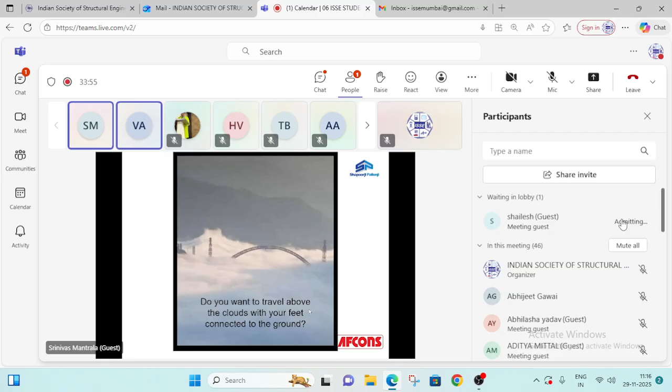Do you want to travel above the clouds with your feet connected to the ground? When you travel by aeroplane, you are above the clouds, but your feet are not connected to the ground. If you want to travel like this, you have to go by Chenab Bridge. This is the photograph of the construction site when we were erecting the arch in a beautiful winter month. So the bridge is above the clouds. Now it is a good season for anyone interested to travel to Jammu and take a train to Srinagar.

Chenab Bridge is the world's highest railway bridge and is a part of the Udhampur Srinagar Baramulla rail link project, and it is located in the Himalayas. They are young, active mountains, the temperatures go sub-zero, it is difficult to access, and a sensitive border area. These are the issues related to location. This is the location of the bridge, the Chenab Valley, where we have constructed the bridge.

But there is something behind the bridge, the spirit of the bridge. That is the real bridge, and that spirit is new technologies and innovations. Implementing new technologies and innovations is not a joke. It cannot happen just like that. One example: suppose you want to cook a nice dish and impress your fiancée. Do you call her and then prepare it just like that and give it to her? Then she will throw you out. Same is here also. So what do you do to impress her?

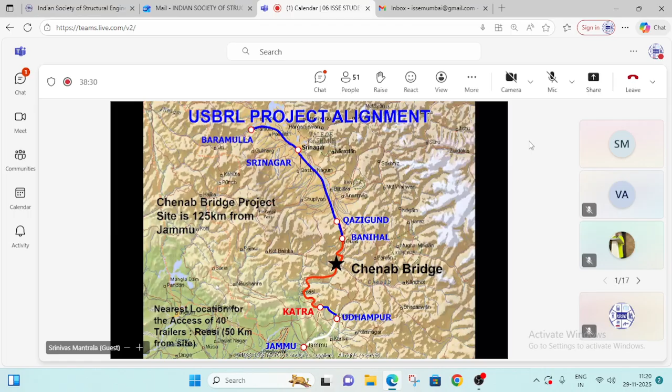So these are the people involved. Northern Railways and Konkan Railways are the client. Contractor is Afcons in a joint venture, and the design consultant is from Finland, WSP Finland, and Leonhardt Andra and Partners for Germany. Proof consultant is Scott Wilson Kirkpatrick, now they are AECOM, and Flint and Neill. Flint and Neill are the people who drafted the BS 5400 Part 10 on fatigue detailing. They are the proof consultant for the steel structure, and they're really excellent.

We learned a lot because of them on fatigue detailing. And we have slope stabilization consultants, IISc Bangalore, Professor Sitaram, and IIT Delhi, Dr. K.S. Rao and Professor K.G. Sharma. And Itasca was also engaged. Itasca developed the UDEC and 3DEC softwares.

But I'm very happy to inform you that the entire construction engineering is done in-house by Afcons. Construction engineering is not a joke. Again, this was done with many people involved, guided by Mr. Girdhar, Deputy Managing Director, and Mr. S.B. Joshi, a very famous consultant across all construction companies. They are all involved, and many Afcons engineers were involved in construction engineering.

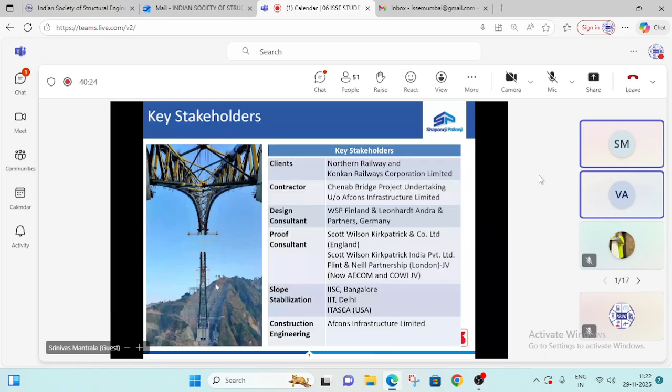So this is the general arrangement drawing of Chenab Bridge. The central portion, the main portion, is the arch, which is a 467-meter span, around 362 meters above bed level, and taller than the Eiffel Tower. Most importantly, on the approach viaduct there is also a transition curve.

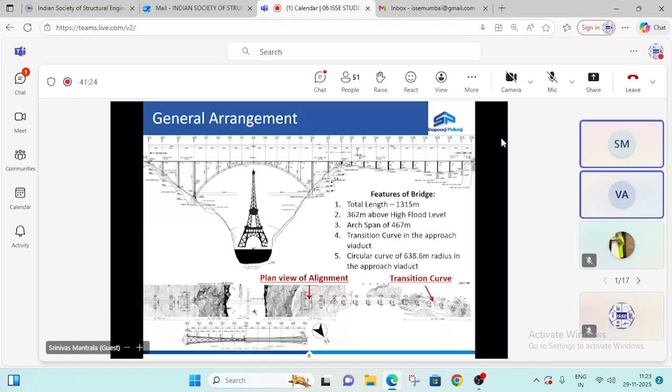Transitions anywhere are the most difficult part to handle. Let me give a general example. Somebody smokes very well, almost 20 cigarettes a day, fine, there's no problem for him. And he stops smoking cigarettes, fine, there's no problem. But he will have a serious problem in the transition from smoking to stopping smoking. In that transition period he will have a tough time. Engineering is the same thing, everywhere it is the same. So we had a problem in the transition curve, and we have solved it.

The entire general arrangement of the deck is a continuous deck. In the arch portion it is a 785-meter long deck, only one piece, and in the viaduct portion it is 530 meters. For construction of this Chenab bridge, we put up a cable crane with a span of 930 meters, and between anchorages the distance is more than 2 kilometers. This is the arrangement we have created.

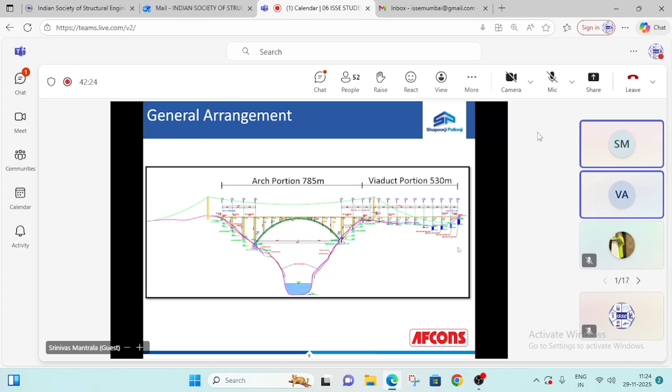Highlights of Chenab bridge: it's the world's highest railway bridge. Design life is 120 years. Normally we design bridges for 100 years, and in some parts of the world they design only for 50 years. We have done incremental launching of deck on a combined circular and transition curve for the first time in the world. We also brought the world's largest capacity cross-bar cable crane. This is the first project, based on my knowledge, where extensive wind tunnel testing is done - topographic, section model study, aeroelastic model studies - done for the first time.

Sir, we are unable to hear your voice. Srinivas sir, you are not audible. I think there is some internet connectivity issue. I am just trying to speak with Dr. Srinivas. Please bear with me.

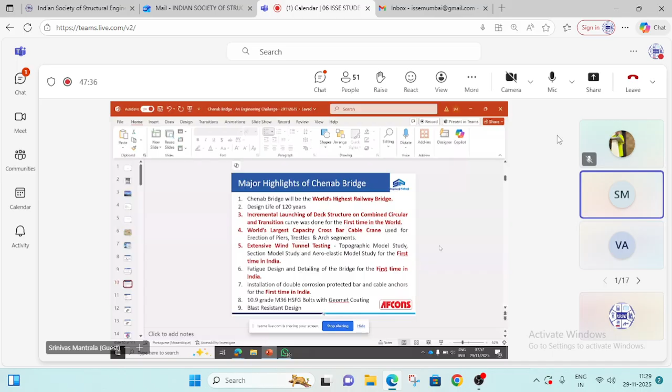Now, fatigue design and detailing is done for the first time in this company, in this program, in this country. And most importantly, after we started fatigue design and looked into the issues, Indian Railways issued a correction slip to the Steel Bridge Code, the IRS Steel Bridge Code. They changed it and incorporated clauses for fatigue design, and in fact brought an appendix for that. We have also installed double corrosion protected bar and cable anchors for the first time in India.

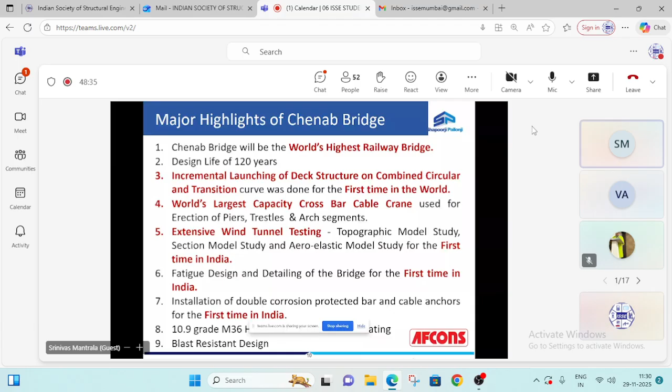We have used 10.9 grade, very high strength HSFG bolts, and we also did blast resistant design and special considerations in the design. These are design challenges. Due to the geographical location near zero temperature, we went for special structural steel. Since it's a seismically active area, we developed the site specific response spectrum, did dynamic analysis of the structure, and carried out ductile detailing of the structure.

Geologically the strata is very challenging, so we conducted very detailed geotechnical and geological investigations and extensive slope stability analysis. In fact, slope stability analysis has been done before construction and during construction, which is a salient feature of this project.

Very high wind speeds are expected. So the system has been designed such that if wind speeds exceed 90 kmph, train operations will be stopped. Necessary instrumentation has been provided for this, and the design is based on wind tunnel tests.

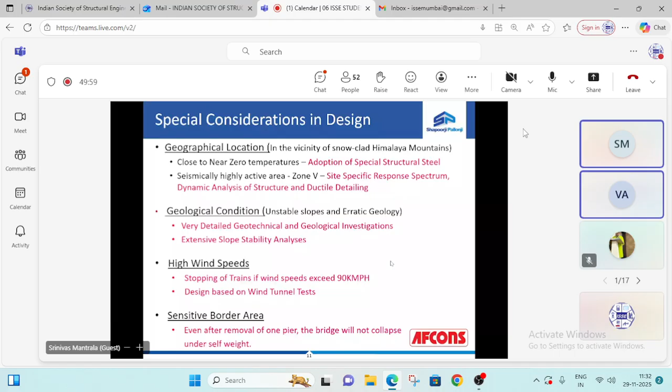It is also a sensitive border area. Even if you remove one pier, the bridge will not collapse under self weight. Normally bridges provide simply supported spans, but we went for continuous spans - that's why we have provided 785 meters continuous deck on the arch and 530 meters on the viaduct.

We also built in redundancy - suppose even if you remove one member, the entire thing will not collapse. For example, in the arch, if you remove the bottom chord, you will still be able to carry trains on the bridge. Similarly, even if you remove one diagonal bracing member, you will still be able to carry trains. This is how the entire design has been carried out.

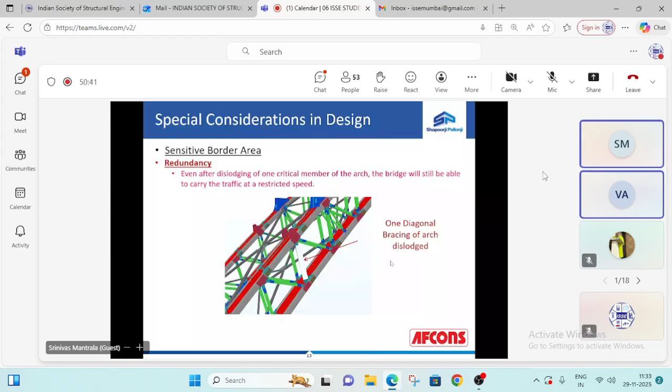These are the broad quantities: around 10 lakh cubic meters of excavation, 73,000 cubic meters of concreting, 76,000 square meters of shotcreting, 90 kilometers of rock bolting, 30,000 tons of fabrication for the permanent structure, and almost 10,000 tons of fabrication for temporary works. We have installed more than 3 lakh HSFG bolts, and I am very happy to say that not even a single bolt hole has been re-drilled. It's a commendable job done by the fabrication team.

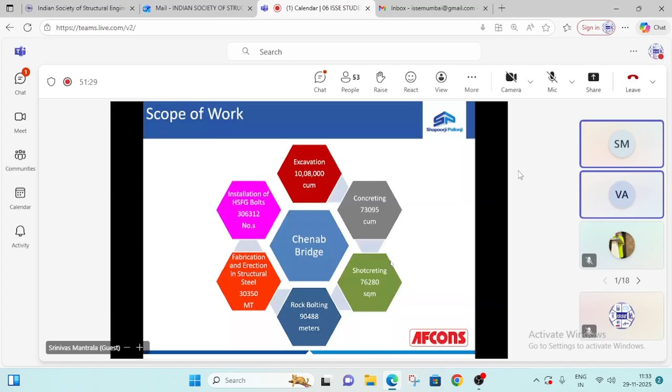This is the incremental launch deck with combined circular transition curves, and the launching was done in two parts - one from the abutment side, one from the other side. When we did launching from both sides, the joint where they meet, which we call the golden joint, had to come within an accuracy of 3 millimeters. That is the level of tolerance we have achieved.

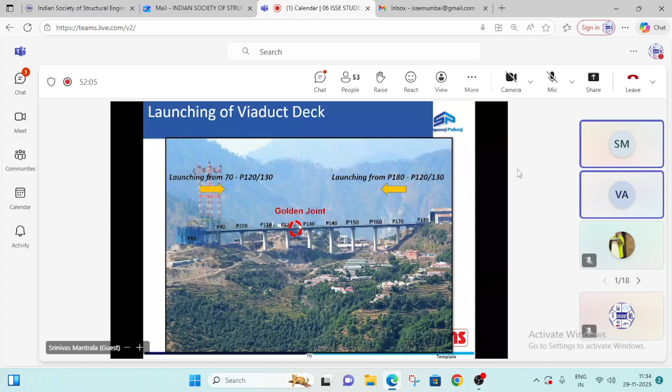This is the left bank with 6.3 lakh cubic meters of earthwork, rock bolting, and these are the details. But when people looked at it, they had doubts whether this could be excavated to the proper shape - the slope is almost 50 degrees steep. In fact, a question ridiculing whether we'd be able to do it was asked. It has been answered with a yes, and this is the finished bank - 215 meters plus another 40 meters below has been excavated and stabilized.

The foundations are constructed on the berms, which are meticulously planned.

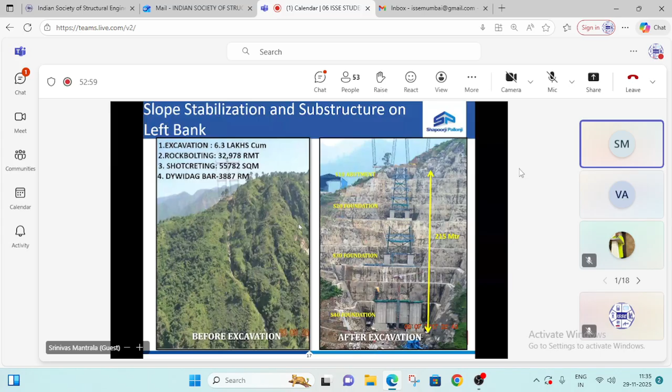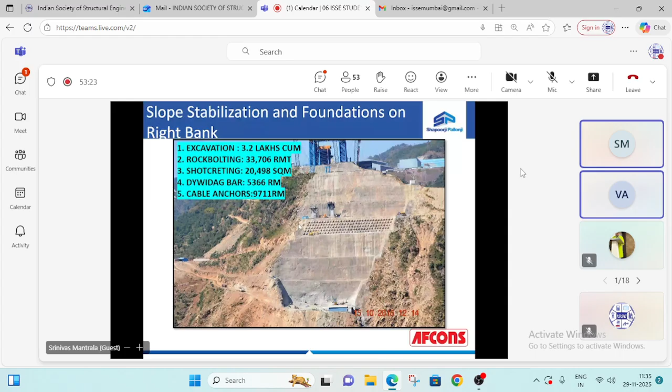This is arch erection in progress on the left bank. This is the right bank, which is relatively weak compared with the left bank, so it has been provided with pre-stressed rock anchors, rock bolts, rock anchors. This is the fully stabilized right bank with arch erection in progress, and arch erection is now completed.

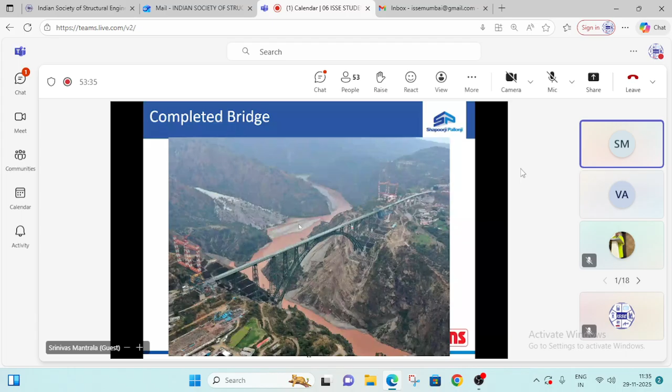The bridge has been completed, and the platform for blast protection has been installed.

It requires special expansion joints on the bridge and special expansion joints on the railway track.

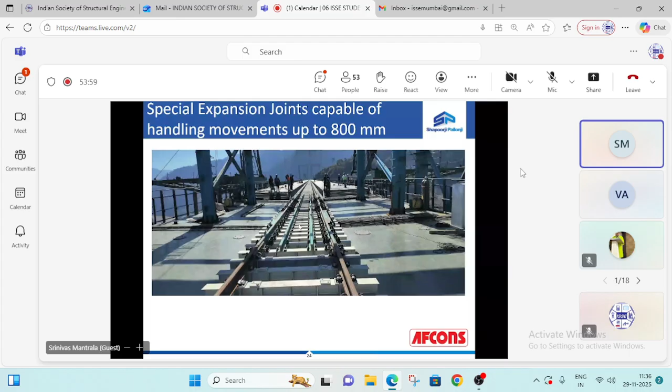Now let me take you through the challenges handled.

To start with, the geotechnical investigations. I'm not going to talk about routine investigations like boreholes and all.

In Chenab Bridge, we have left bank and right bank. You see how steep they are, and the strata is varying. People wanted to know what is the strata below the founding level of the arch, which is the most critical part.

There we have constructed a drift. The drift is something like 2.5 meter diameter. It has been excavated, and it is in the form of a cruciform.

It is about 7 to 8 meters above the founding level of the arch. Why is it above?

During excavation, the drift will go away. Otherwise, if you do it below the founding level, you are leaving a pocket below the foundation level and keeping the foundation in an unsafe condition.

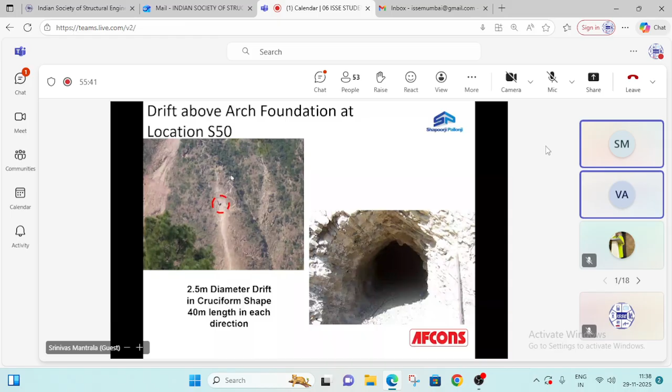There is no access road. All the components for drilling and testing have been brought through what is called a tracer path. People moved along the tracer path and then excavated the work to make this drift.

It is in the form of a cruciform, and this is around 40 meters and this is around 40 meters.

We have done the geological logging, and we have done in situ plate load tests and in situ shear tests, box shear tests.

These type of things people usually do in dam projects, hydraulic dam projects, whereas for this type of bridges this is maybe the first time.

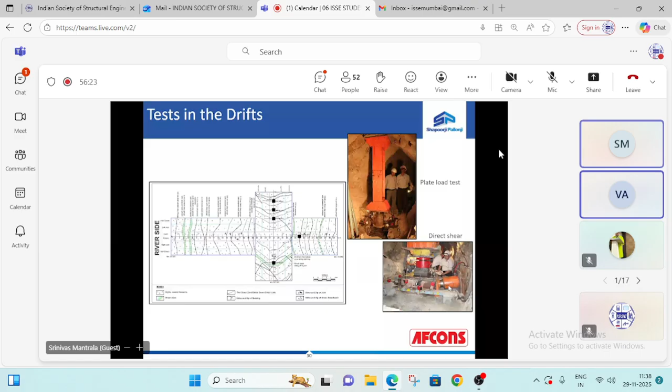These are the different types of tests we have carried out. You name anything, it is there.

Dilatometer test, MASW test, tomography, all these things have been done, and the data has been used to understand the bearing capacity, settlement characteristics, and for the design of the slope stabilization measures.

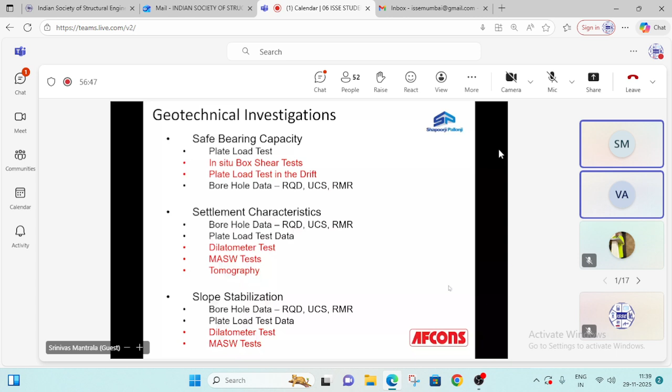One of the challenges handled successfully is wind force assessment. I would like to say a very, very interesting point.

This I learned when I was working on the missing link project, not in Chenab.

Hello, can you hear me? Yes, sir, yes, sir, we are able to hear you. Yeah. Then, yes, yes, sir.

For aerodynamic stability of the bridges, we consider the 10,000 year return period of the wind. Normally, bridge design uses a 100-year return period, but for aerodynamic stability we use a 10,000 year return period.

Why? I'll explain later, but this is a very interesting fact, and we did a lot of research and found out the answer also. This is a deep gorge, and because of this gorge, there is what is called a Venturi effect.

Then wind speeds will increase, so those will be more than what is prescribed in the codes. So we have done a terrain model test. We created a terrain of 11-kilometer disk, that is 1 is to 2200 scale, and put it in a wind tunnel, and by rotating the disk in different directions found out which direction causes maximum wind and what is the maximum wind speed. Against a basic wind speed of 39 meters per second, we found a wind speed of 74 meters per second. So almost the wind forces will become four times. You all know that wind force is proportional to the square of the velocity.

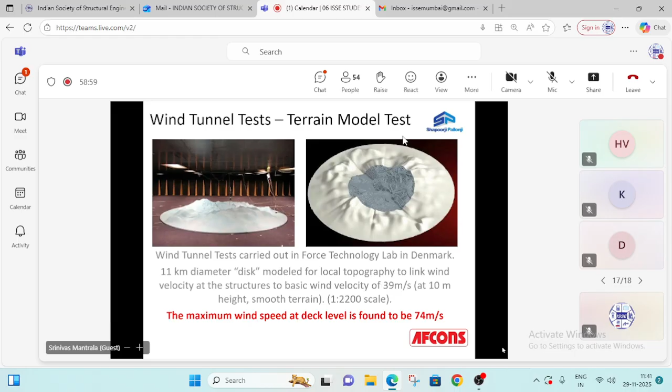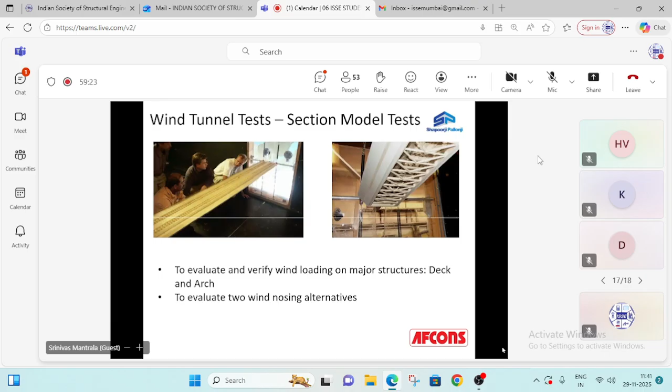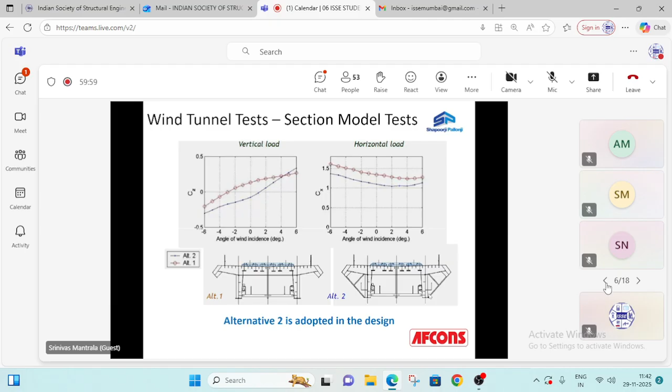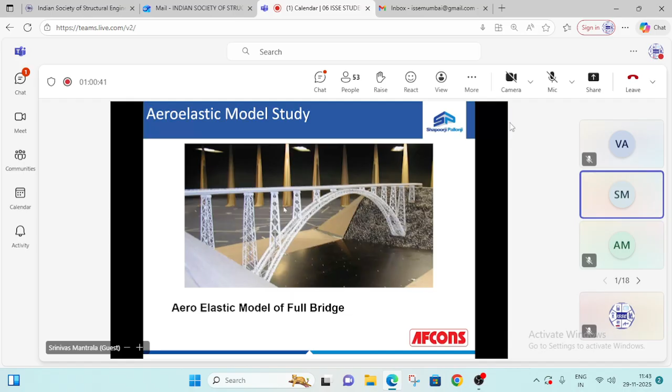Then we have done an aeroelastic model of the full bridge. When we did this test, we found vortex oscillations, that is, the bridge is oscillating up and down more than permissible limits. So one of the solutions was to fill up the arch with concrete. The arch members are originally box sections, so all the box sections were filled with so-called free flow concrete to add to the weight of the structure, and with that the problem has been mitigated.

And we have done a site specific response spectrum; IIT Roorkee has done it. But I want to tell you a few things. Many people question such an iconic structure being put up in a very sensitive area from earthquake considerations. If you look at the seismic zoning map of India, Chenab Bridge actually comes under Zone 4, but we designed for Zone 5 acceleration, that is 0.36 g. And the slopes have been designed for four different conditions, whereas normally we design only for two. In Chenab Bridge, we designed for static, construction stage, service condition with the design basis earthquake, and service condition with maximum considered earthquake. Previously we did not consider vertical seismic acceleration, but we considered it also in the designs.

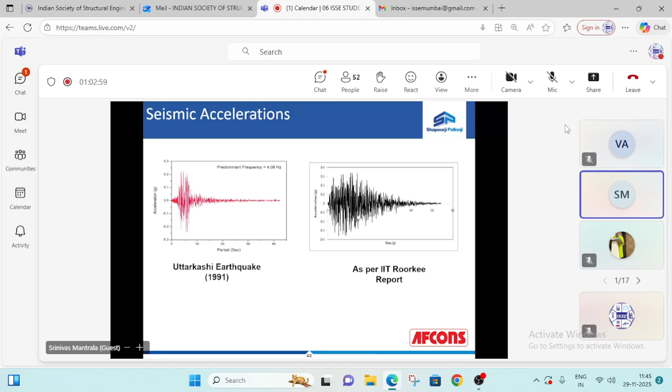Then this is the earthquake spectrum of Uttarkashi, which was the most severe earthquake in the region. But as per IIT Roorkee, this is the earthquake spectrum we have considered, where the accelerations are 0.2, 0.25, 0.22. In our case we have considered 0.36, and this spectrum is used for dynamic analysis. The earthquake happened in about 6 to 7 seconds, or 10 seconds maximum, whereas here we have considered up to 50 seconds. So with this most stringent spectrum, we have analyzed the slopes of Chenab Bridge. So rest assured, the slopes of Chenab Bridge are in safe hands.

Excavation of slopes is a beautiful subject for me, and this is part of my PhD thesis. Design of slopes, or for that matter any design, I feel should be holistic. Many times, design consultants tell the engineers, "I have designed this structure. It is your problem how to construct." That is not the right approach. The whole purpose of design is to give good for construction drawings. That is the bottom line. For that, they have to consider many parameters: the execution schedule, methodology, materials, equipment, good engineering practices, and do you require any analysis?

During analysis and design, the designer will specify certain requirements. Do you require any monitoring during construction or after construction? All these things you have to consider and develop the good for construction drawings. So I coined it as holistic design of slopes, and this has been really followed in Chenab Bridge.

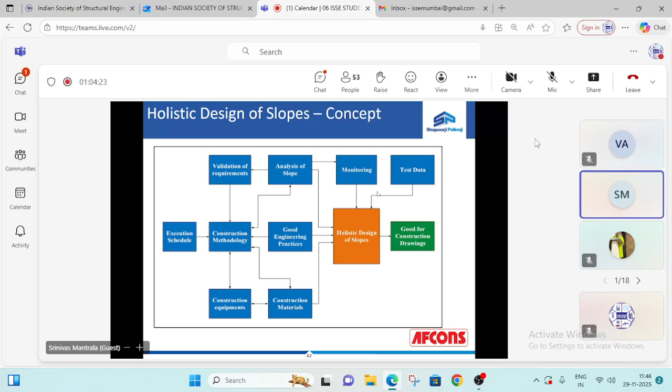And then now I showed you a very steep slope we have to excavate. And when we started initially, we were getting a progress of something like 5,000 cubic meters per month, and we have to excavate something like 600,000 cubic meters in the project in that area in the left bank. That means it is going to be a 10-year project or 120 months project. Can we afford to take so much time?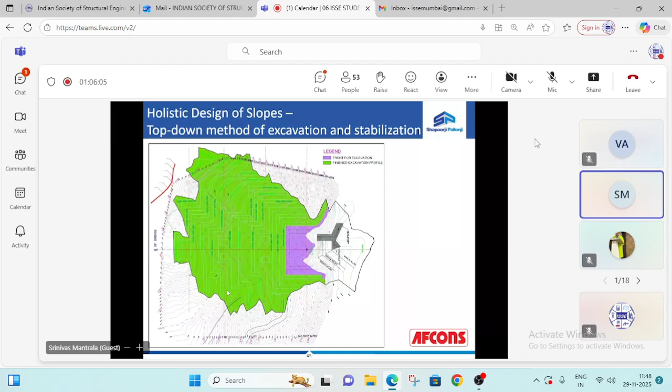And then when you see next, as the work progresses, you see your work front is increasing. This purple portion is increasing, and you can have multiple portions to do the work. Then if you go further, this is how the work completed. And by following this method, not even a single untoward incident happened in the project during slope stability excavation on left and right banks. Not only slope stabilization, in any area of the project safety was given highest priority.

But this is not the only thing. This is the left bank, but we have to create approach roads on the bank to access various berm locations, and also to drain out the material at different levels. And this is the way the approach roads have been made and the slopes have been completed.

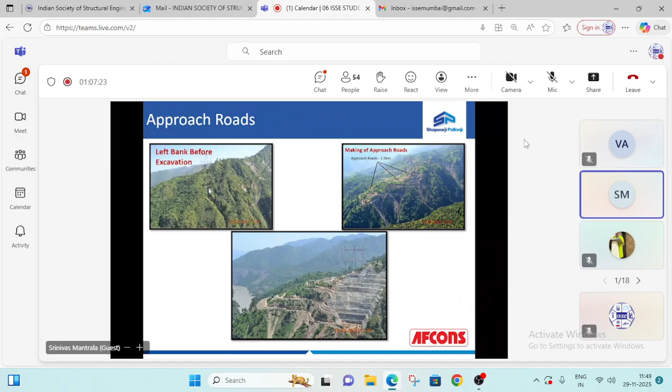And we have two engineers, very fine engineers, by name Mr. Tagore and Mr. Vijay Pai. In fact, they used to walk in front of the excavator in this figure, and they used to guide the operator that he has to move 2 meters up, 3 meters down, 2 meters left, 1 meter up. So, like this, they walked in front of the excavator and got the approach roads done.

Then, open joints and cavities in the strata. There are open joints in the strata, and we cannot leave this type of open joints in the Chenab bridge. And I'm telling you, I'm not joking, if you remove this rock, a person can go inside and stand there, sit there and do some tapas. So this type of open joints are there, and we have pumped something like 5 lakh bags of cement to seal all these joints.

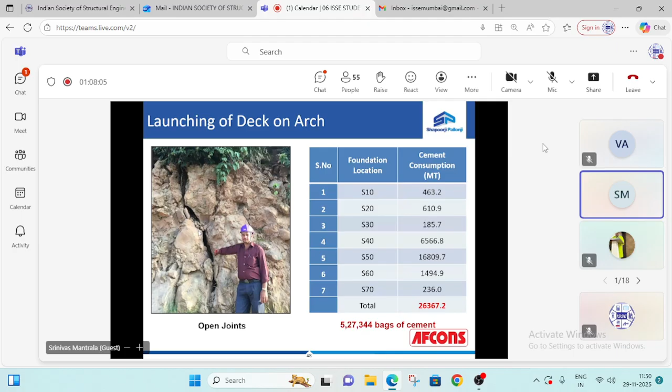Now, you may ask me, अब तो कुछ चोरी किया होगा, but if I do chori, it will be known. The figures don't speak that way. Before grouting, we have the values of shear modulus and all, and after grouting, we assess the values. You see, the values have increased by almost 2 to 9 times.

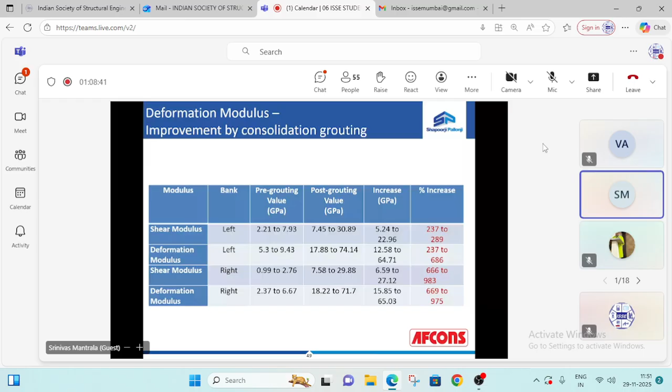Then this is the image, MASW image, before grouting. This is the image after grouting. In this blue portion, there are no black spots. These black spots are the weak areas. So where we have done grouting, 0 to almost 22 meters, there are no black spots. This is a proof that we made an excellent cohesive mass and filled up all the loose joints in the strata below all the foundations.

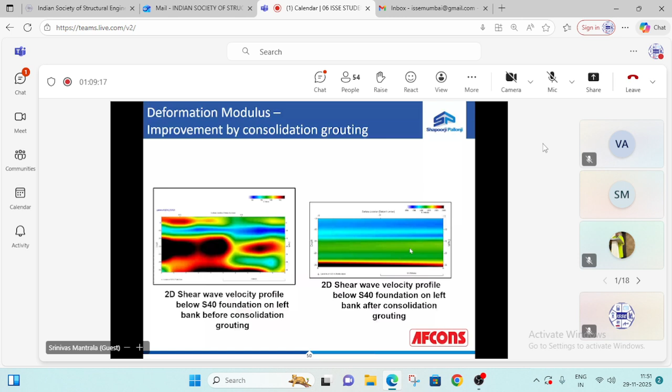And then we made a statement in the beginning that the strata is highly varying. Now to start with the designs, we have the data from trial pits or borehole data. Then came a basic question: you have taken a very small sample for the design and the strata is varying, so how reliable are your designs? So then we told the client that yes, we will have a setup to do continuous checking of the designs as the excavation progresses. And for that purpose, we developed a prototype concept, design as you go.

In this work, we purchased three sets of software, SWEDGE and DIPS, and provided them to geologists. This is perhaps the only site where six geologists are working. They were trained and became half civil engineers at the end of the day. They do geological logging, they do slope stability analysis, and if everything is fine, they go ahead. If not, they revise the design. In the slope stabilization work, we created more than 150 construction stage reports. And this is the geological log we finally prepared after the complete excavation of, I think, the left bank.

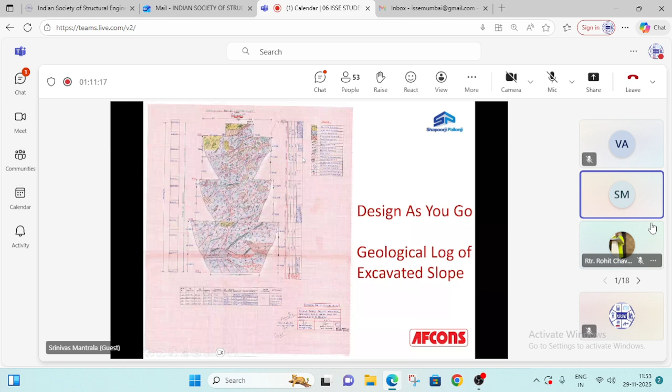Then another challenge is incremental launching on combined circular and transition curves. So I just want to have a recap of fundamentals of curves. Can somebody tell me what is the radius of a straight line?

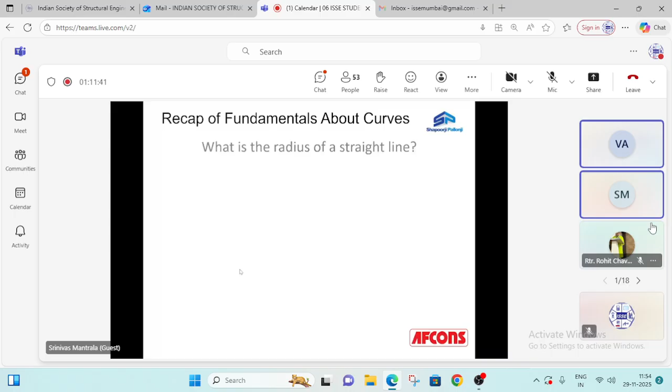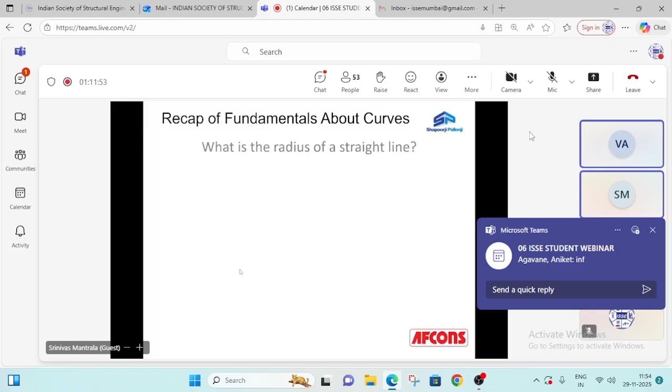Hello? Hello? Infinite, sir, infinite. Infinite. No, Vivek, you should not tell. I mean, students, it is infinity because, sir, some students told me also it is zero. Yeah, and because some people said zero, that's why I asked this question.

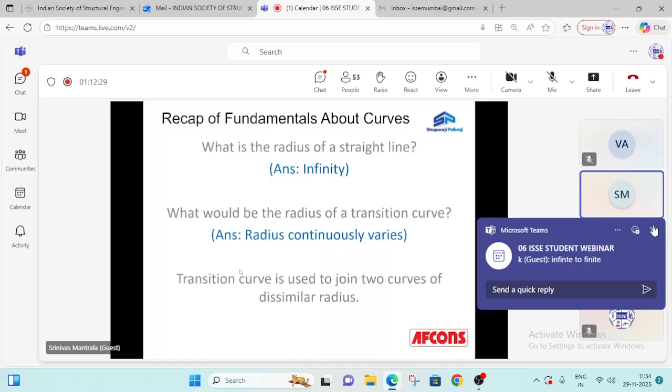So, what would be the radius of a transition curve? It continuously varies. It starts from infinity and it comes to a particular radius. Transition curve is used to join two curves of dissimilar radius. So, normally incremental launching is done either on a straight alignment or on a curve of uniform radius.

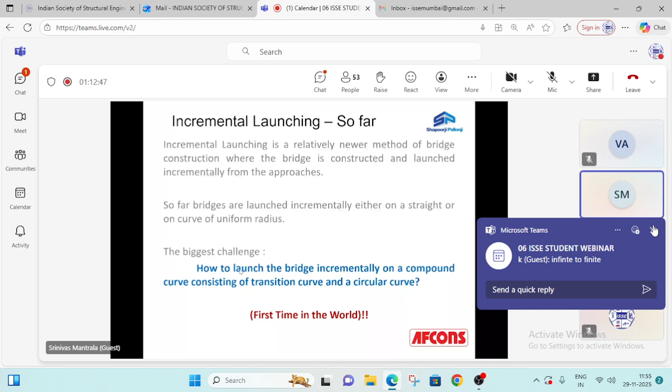Now, here I would like to say something. We have done this work in Chenab one time over. If any student is interested, I can guide him how to develop the radius of this launching circular curve. In Chenab, one project I have given to a student of IIT Kanpur and he has done it and he got his MTech thesis out of that. Maybe this can be a BTech project work.

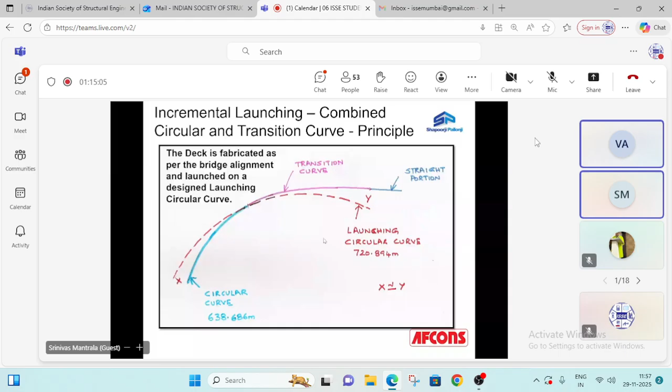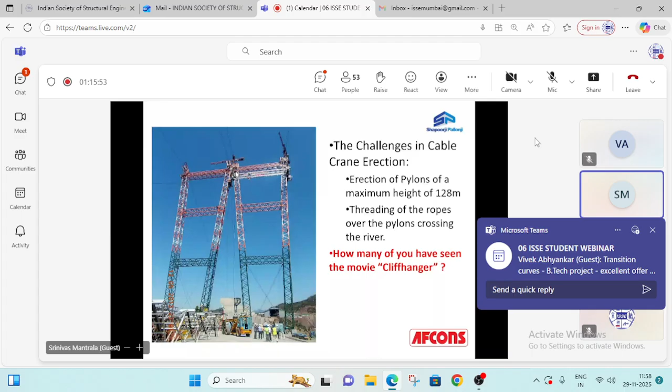There's a very old movie, Cliffhanger. Sylvester Stallone was the hero, and he climbs the vertical cliffs. So we copied from him. We developed what is called a climbing crane. This climbing crane was designed by Mr. Kanolkar from Bombay, he is no more. We erected the portion which is possible up to 50 meters with the help of a tower crane, and after that the work was handed over to the climbing crane.

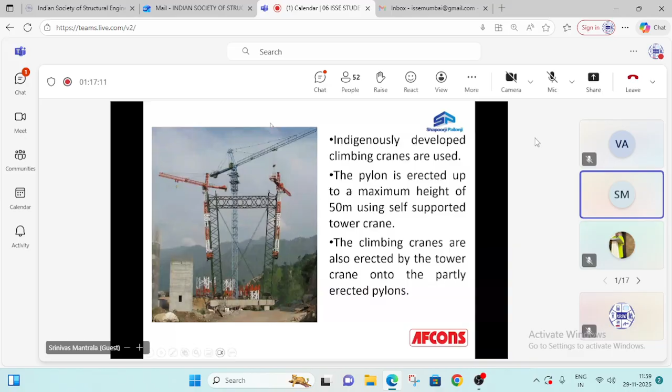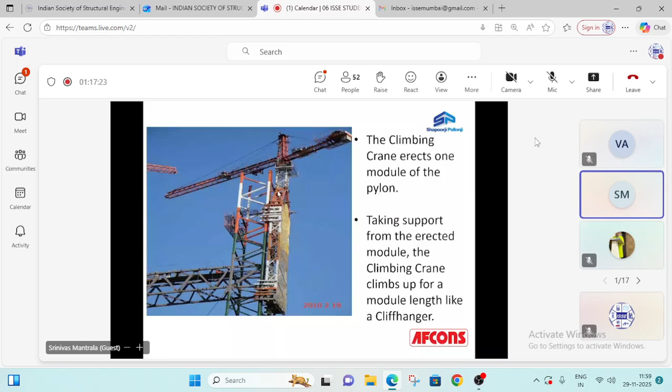What the climbing crane does is it will pick up the module from the bottom and erect it. Once it is erected, it will hold that erected module and move up. So look here. In this figure, no module has been erected. But in the next figure, you will find the module has been erected and the climbing crane has moved up. This is a beautiful principle we followed from Cliffhanger, and it moves right up to the end, and we completed the pylon.

Likewise, we completed the pylons. There are four pylons, two on Bakkal side and two on Kauri side. After completion of these pylons, now we have to put the cable on the top of it.

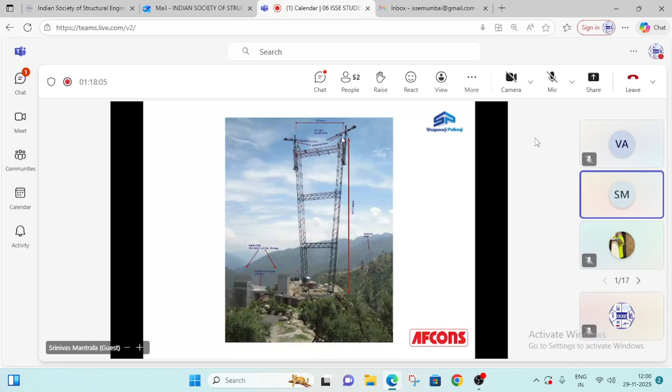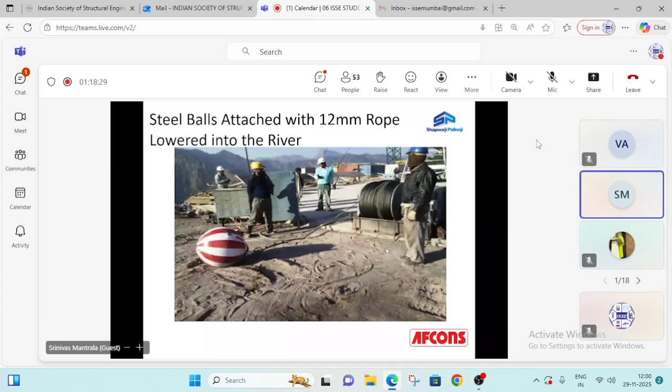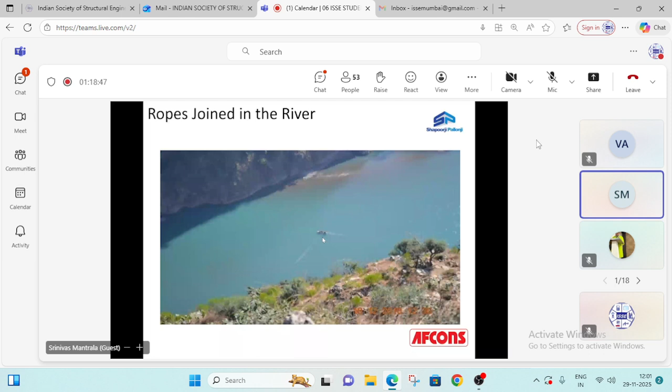So then the balls fell from both sides into the river, and somebody went with the help of a boat and brought both the ropes together, and then we have one single rope of 12 millimeters from one side of the bank to the other side of the bank. Then to that 12 rope we attach 18, 18 to 36, 36 to 58, then we pulled the ropes from one side to the other. Then the cable has gone from one side to the other, 58 thick cable.

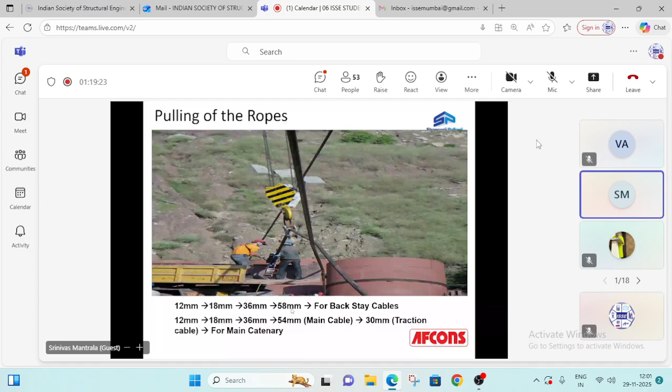Then that has been put on the top of the pylons with the help of a cable crane, climbing crane. So that is how the pylon is ready, and then it has been connected to the anchorages. These are all gravity anchorages, and this is the cable crane which has been commissioned. The cable crane will have a crossbar. The weight of the crossbar is 6 tons. The capacity of each cable crane is 20 tons. So the lifting capacity of the crossbar is 34 tons.

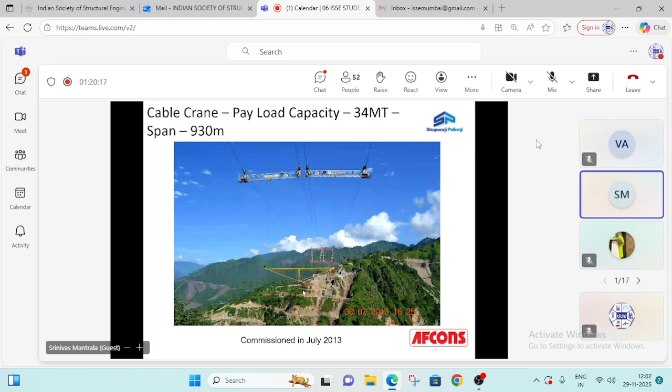Why this 34 tons? This 34 tons is relevant because when we are erecting the arch, the weight of a component of the arch should not be more than 34 tons. So that is the input from this cable crane design to the arch designer. That is where complete coordination with temporary works, mechanical works, methodology, everything should be seen together. We can't see them in piecemeal.

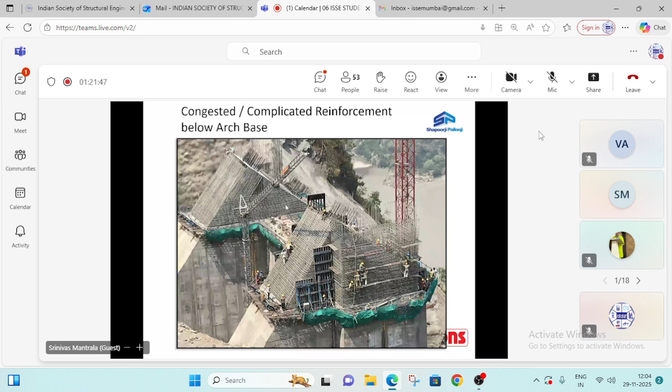And this is further complicated: I have to insert the anchor bars for the arch base, and these things cannot float in the air. These are very heavy, if I remember correctly, 40 diameter Dywidag bars, so they cannot stay in air. And they should be in accurate position, so they require some sort of stools. And how to place these stools without infringing with the reinforcement? That is another challenge.

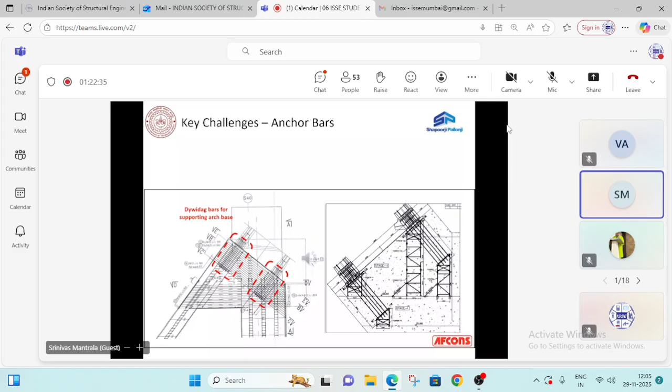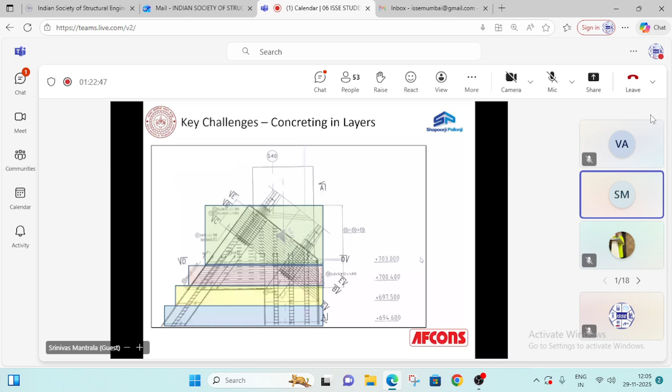Then it is further compounded by the fact that the concreting has to be done in four different layers. It's mind-boggling work done by Afcons engineers, but they went very systematically. How did they go? The approach is first you develop virtual design and construction. Then you make a first run or mock-ups, then sit with the team and work out a detailed methodology of work, then you follow the discipline.

So we have Tekla software, and using the Tekla software we have completely modeled the reinforcement, and then we positioned everything so that there is no infringement. Then we made a mock-up. Please understand, I told you a recipe for how to impress your girlfriend. So this is what we have done. We have done first a Tekla model,

then we made a model with color coding of the bars, and then these models have been shown to the workers to understand how they have to make this thing. In fact, we have made two mock-ups. One mock-up was made under the supervision of my engineer, Mr. Tagore, and the second mock-up was made by the workers themselves. So we made two mock-ups.

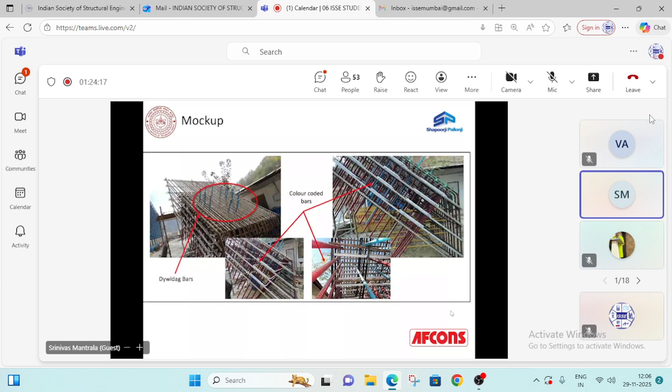Then, after collaborative planning, we made teams and we tagged every bar with a number, and the lifting sequence of the bars was given, and the bars were lifted and brought to site. They are not done at the site, no, they are done somewhere 2 kilometers away from the bridge site.

And so everything has to work flawlessly, and that has been achieved. And finally, this is the jewel we made in this, but unfortunately this jewel is covered with concrete and it can't be seen. So this is the concrete base ready to receive the arch.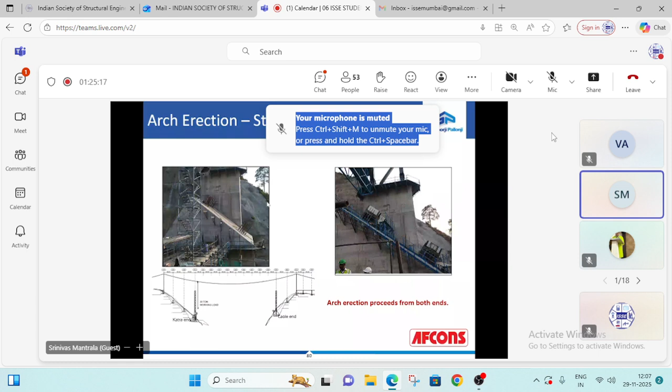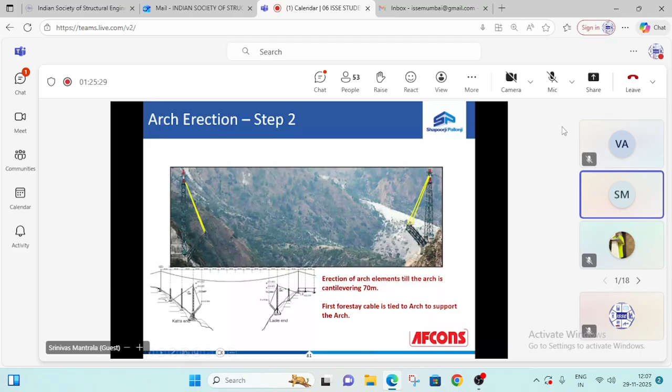So let me take you through the arch erection. So this is how it is. And then as the arch progresses, we started connecting with stay cables front and back, and then it goes like this. But then once all this is done, the arch is ready. So I am explaining it to you in a very simple way, but this arch erection took almost 2 years and a lot of engineering went into this.

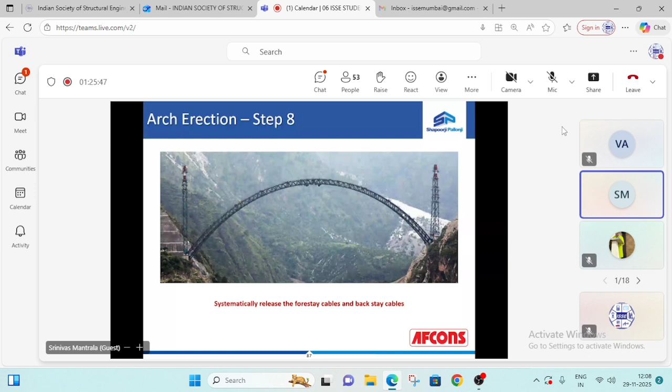See, one of the tallest piers is 140 meters, and the tolerance permitted is 1 in 1000. The designer permitted 100 tolerance in any direction. But what we achieved is 23 as the maximum deviation against a permitted deviation of 100, and this was achieved with a total of 10,000 bolts in the system. So these numbers speak for the quality. Quality where? In complete planning, fabrication and erection.

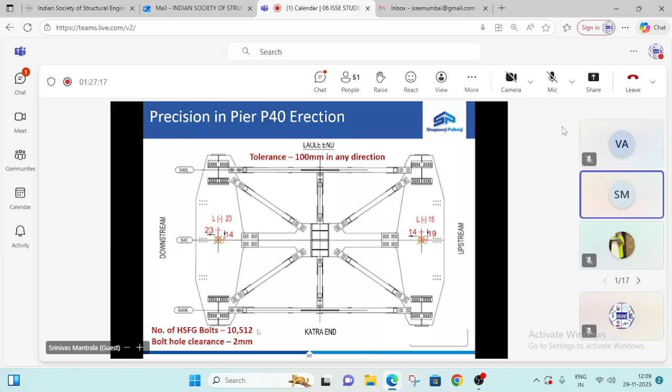And let me tell you frankly, there is no shortcut. We went the hardest way possible and this is the result of hard work. Then this is the arch. When 200 meters on either side is erected in air, these are the tolerances we achieved. Against a deviation of 100, the maximum deviation is 39.

Sometimes I wonder, if I sit myself and take a big, say half a kilometer paper and start plotting it, maybe I may not get this type of accuracy. But this is the accuracy we have achieved in the project. That comes with tremendous dedication. I'll always say, this is like a temple for us, you know. And everything has been done religiously.

Religious means what? It is not praying to God, but that sort of commitment and devotion, you know. When you are standing in front of God, you are completely devoted to Him. You don't think about any other thing. And we work for it. That sort of commitment gave this type of results.

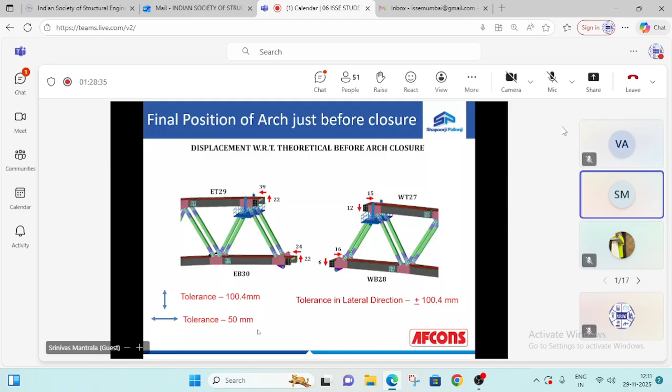And this is the geometry of the base module and how this is achieved. You can't achieve it just like that. One of the things was the arch base module. Before putting that, there is an arch base plate. The initial survey of this base plate is very, very important. If the base plate is slightly deviated, it will go somewhere else when you go 200 meters into the sky. And these survey details have been monitored by none other than the Deputy Managing Director of AFCONS. Unless he approves, we will not concrete.

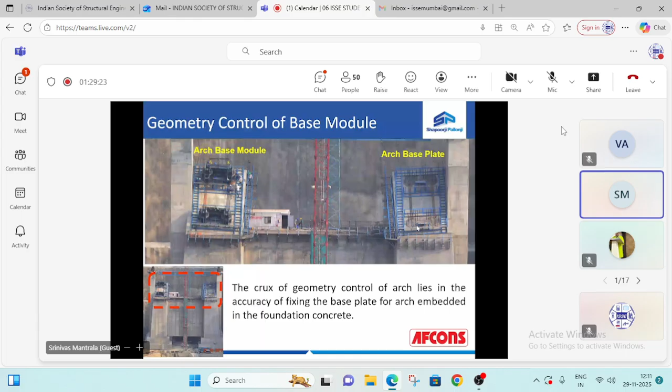And for the survey, we marked 12 points, measured the deviations and tried to adjust. Nobody said how much, but we put a self-imposed tolerance of 5 millimeters in the positioning and worked on it. And at the end of the day, at three or four locations, it was slightly more than 5 millimeters.

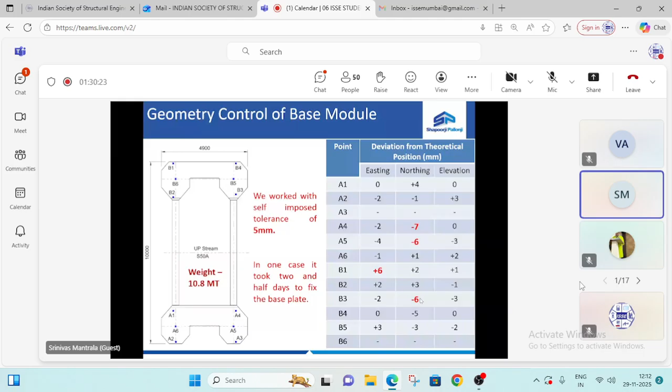And even this we tried to work on by shifting, and for something like 2.5 days we were just trying to adjust. After 2.5 days we decided, okay, only some four minor things, if a problem comes, we'll handle it. Then we moved ahead. So this is the level of commitment shown by AFCONS, not only by field engineers, but by the deputy managing director of the project.

And incremental launching on the arch. This incremental launching on the arch is on a straight line. You may say, what is great about it? This is a very beautiful thing.

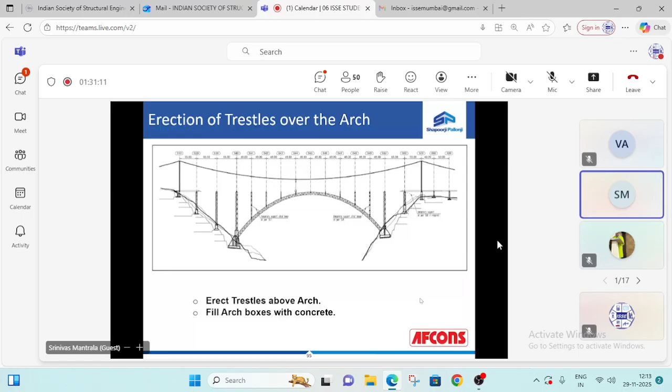It is on a floating support. When you are doing incremental launching on a normal bridge, the foundations don't move. Whereas the arch is provided with camber, and as you start launching onto the deck, the arch tries to settle. Because of the settling of the arch, how do you manage? Still you have to achieve the camber. So camber management is the most important part of this launching of the deck, and it has been done.

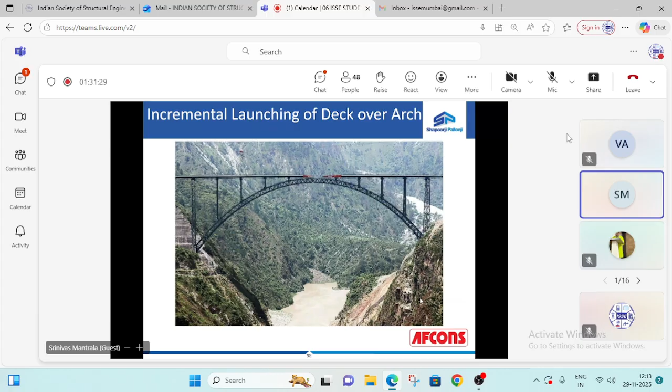So this is how the launching has been done, and this is how it looks like. And the arch deck has been completed.

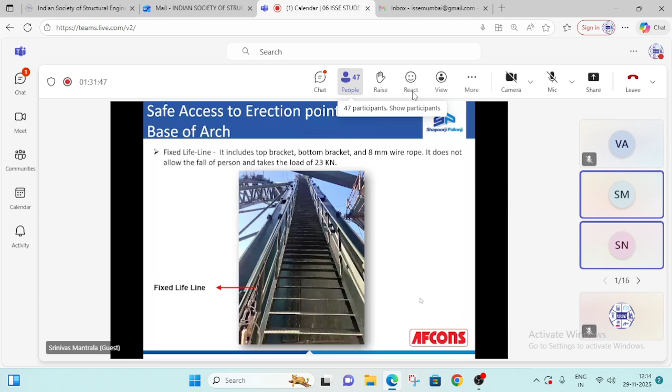And the challenges - another biggest challenge is safety. So for safety, we have what is called fixed lifeline installed all along the bridge so that it works by gravity. By any chance somebody is slipping, the rope will hold him.

So, like this. And we also made - hello, there is a crosstalk. Can you switch off the mic?

And we made a platform for workers to work. This platform is inspected by safety people, the safety manager or safety engineer, before any worker goes there. Each working platform is provided with a tag. If the tag is there, worker will go. If tag is not there, worker will not go.

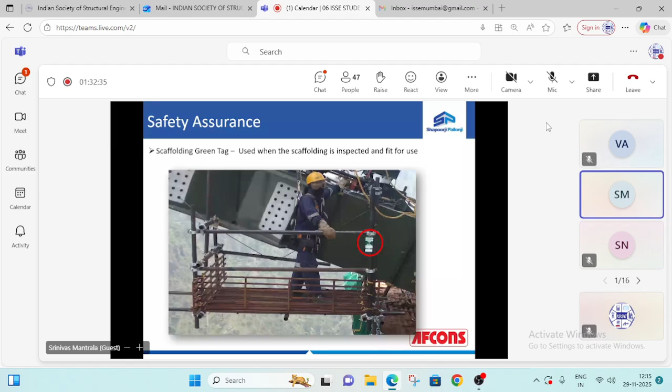And this is how we have done with zero accidents. The National Safety Council of India normally gives the Vishisht Suraksha Puraskar, but looking at the Chenab work, they added what is called Ati Vishisht. This is what they have given for Chenab in 2019.

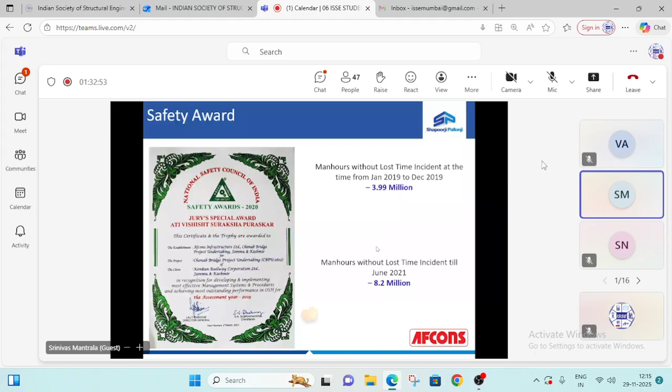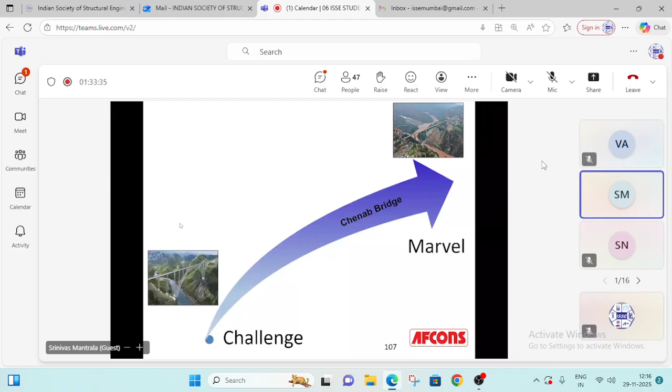So what people say - there is a book by the name Seven Habits of Highly Effective People. Maybe I'll put it as: seven principles for highly critical projects should be like start with the end in mind. This is what happened - we started with the end, and we achieved the end of this project.